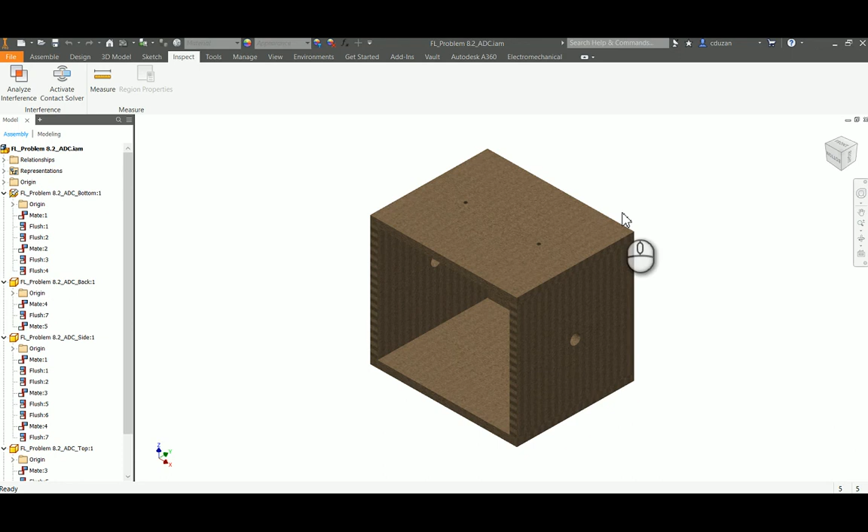So now we're at the point where we can begin assembling all these parts to create our Automata. I'm still looking at my assembly for my basic Automata, and what we're going to do is come out here and place in some of the parts that we're going to need. The first thing we're going to do is call on the axle IPT that we created earlier. I'm going to go ahead and bring that in.

And I guess at the same time, let's go ahead and place in the 2 follower rods we're going to need, so let's just drop those in. I think those were at 6 inches or something like that. They might be a little bit tall, but who cares, let's just make the thing work, right?

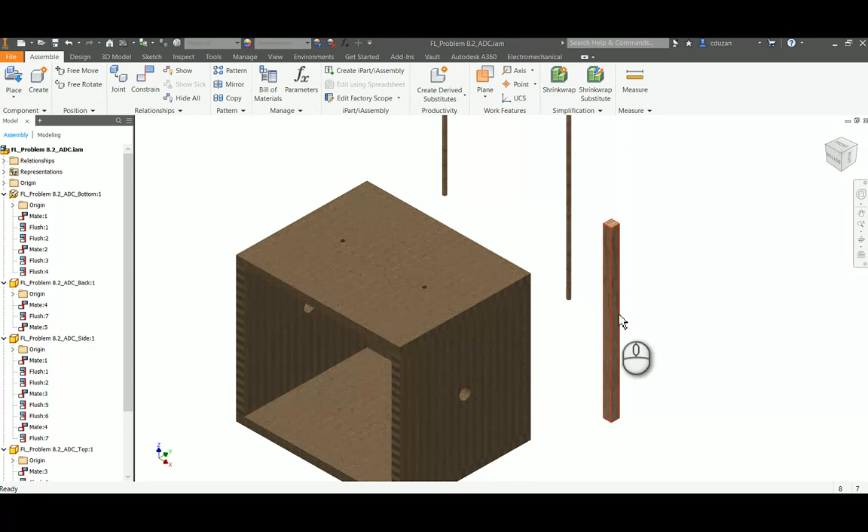So to get a square to go into a round hole, there's a couple things we're going to have to do. We actually need to talk to the square dowel, because we're going to give ourselves a little helpful tool, or helpful feature, that's going to allow us to get these to line up.

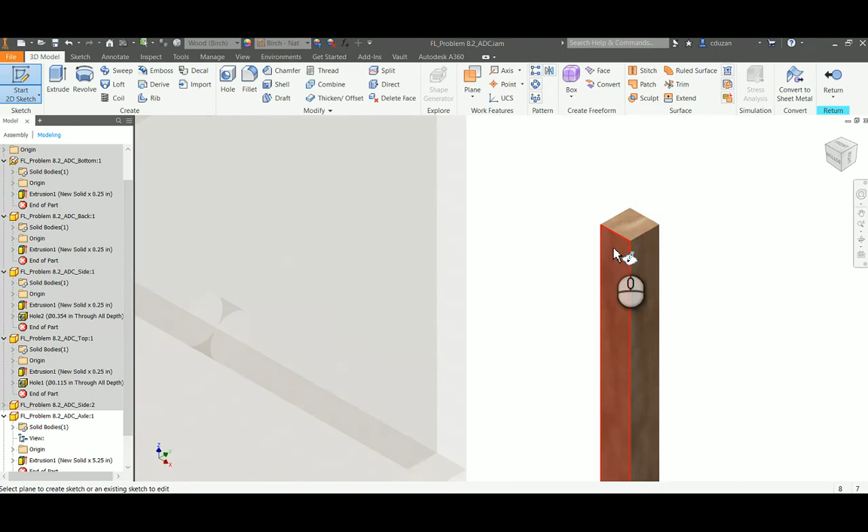So I'm going to double click on that square dowel from earlier, I'm talking to that IPT, and here's what we're going to do. We're going to start a 2D sketch on this face here. I have a point that is currently there.

And we can use that point to create something called a work axis. If the point is not there, what you can do is come up here and draw a point, and place it there. But I can see that my origin point is there, so we're basically good to go.

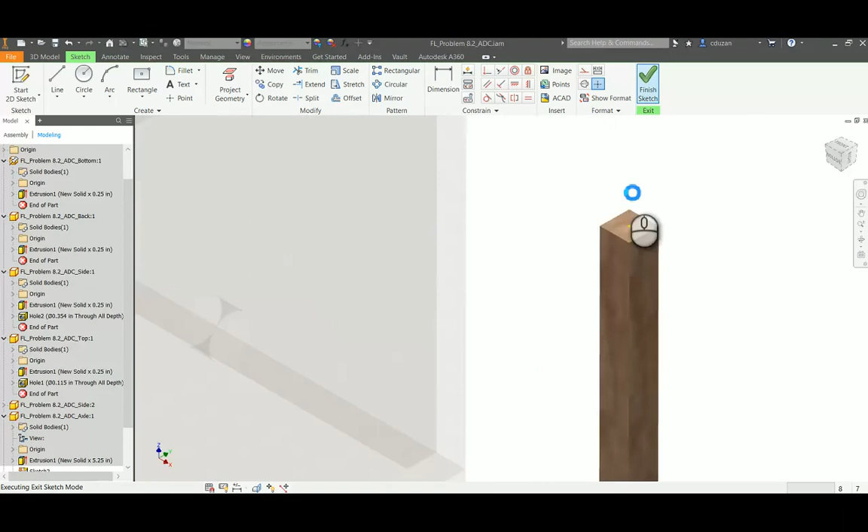So now what we're going to do is finish that sketch, and now I'm going to come up here and look for an axis. I'm going to pick on axis, and pick on this point. Then all I have to do to complete this is come over here and pick on this face. I know I have a white background, it's hard to see it, but there is an axis that is going right down through the center of that, and perpendicular with that face. That's a very helpful thing to have for this next part.

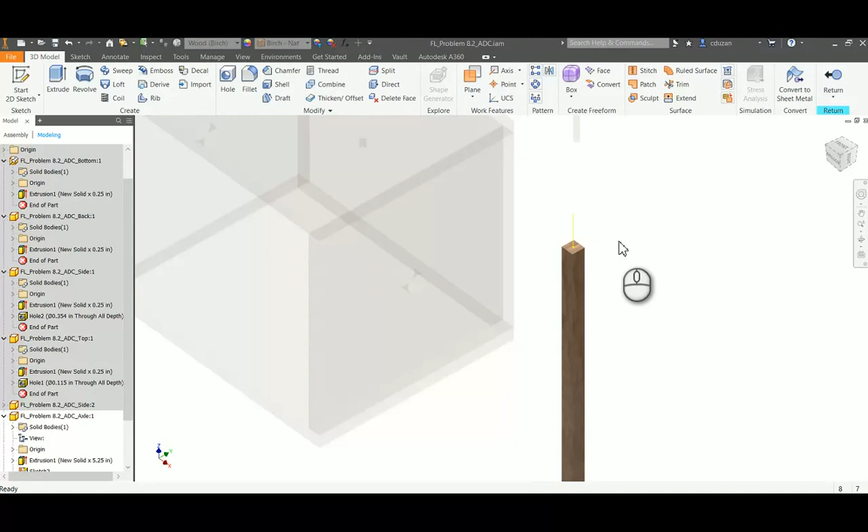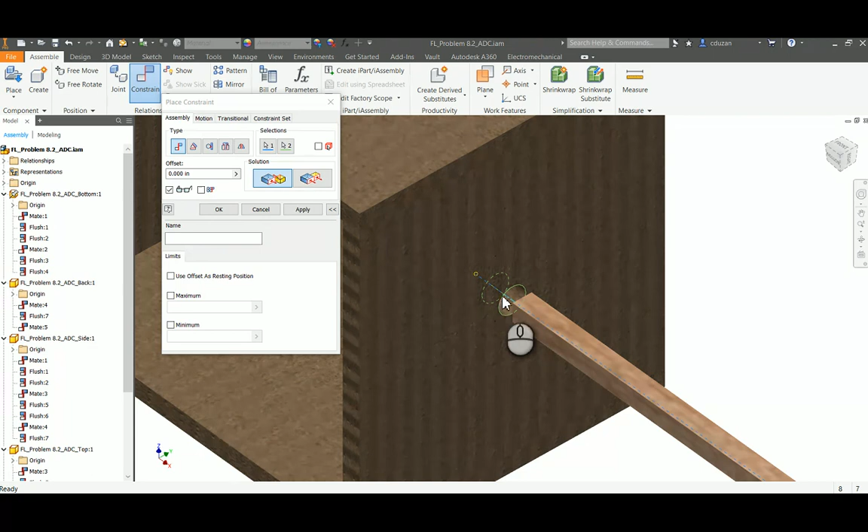So now what I'm going to do is return back to my assembly, and now I'm going to come in here and go to constrain, and I'm going to use my mate type of constraint, and pick on that work axis I just created previously. And if I come to the inside of this hole, you're going to see that this axis is showing up. So now it's actually going to match up the axis of the square dowel with the axis of this hole. I'm going to go ahead and apply this and cancel.

When I do that, now I can see that we can take this axle, and it's going to be able to rotate on that axis, and it's going to be able to slide back and forth through it. So that's great, we're in the right place here. What we're going to be doing next is come out here, and place the shaft collar that I created earlier.

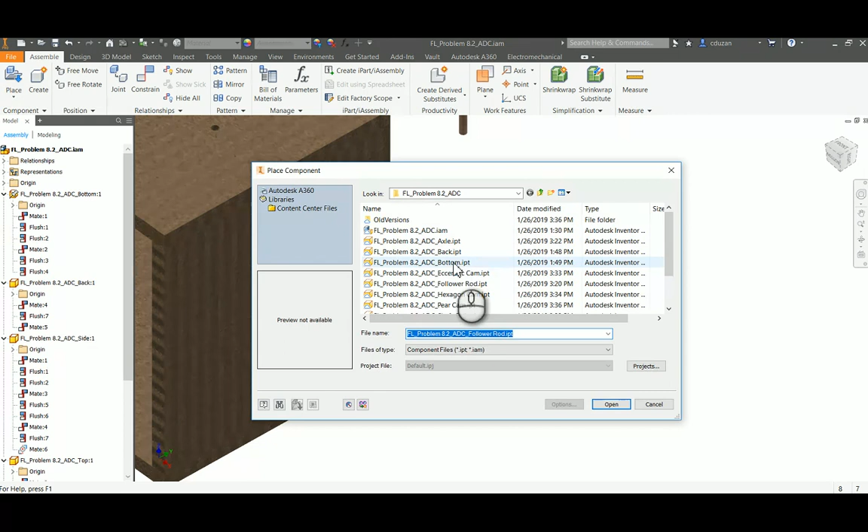I'm going to drop that right in here on both sides of our Automata box. Now I'll constrain it using mate to attach this face to one of the sides. Hit apply, and flush this, making those two faces coplanar.

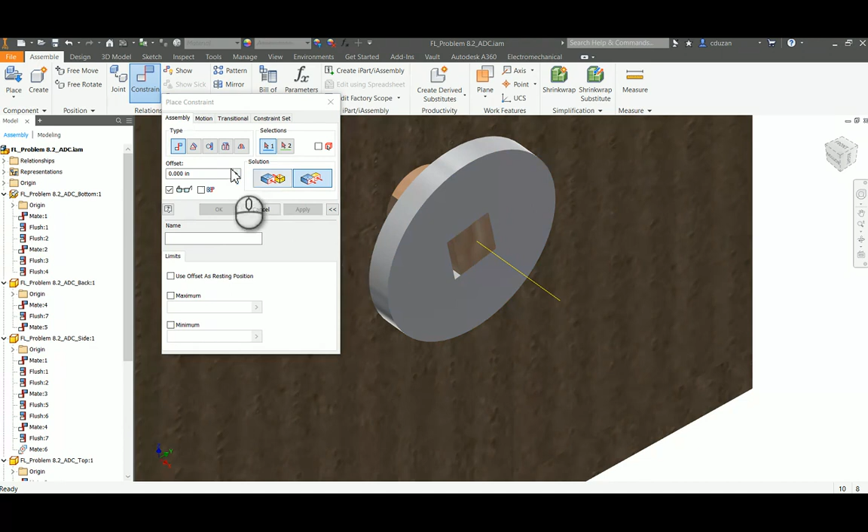Now, to finish this up, I can do a mate between this face and flip it around to this face as a mate. Hit apply and cancel out. Once done, we'll see there's now a relationship between that shaft collar and the actual axle.

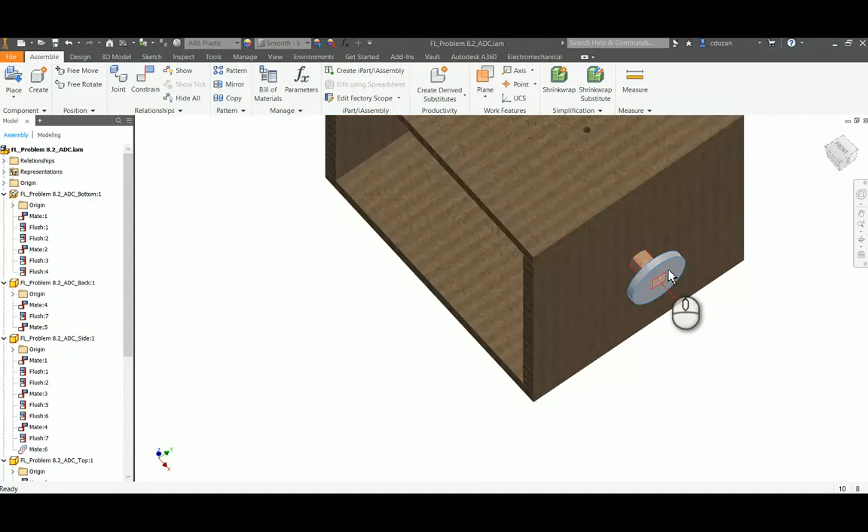Since I built in the distance to my axle earlier, all I have to do is come over here. I can pull this down if I need to—that's what everybody always kind of forgets. You can always pull this out so you can see this.

Now we can go into constrain and do a mate between this face and that face, and hit apply. If we've done this correctly, we should have enough of this axle hanging over the edge where we can now attach this shaft collar.

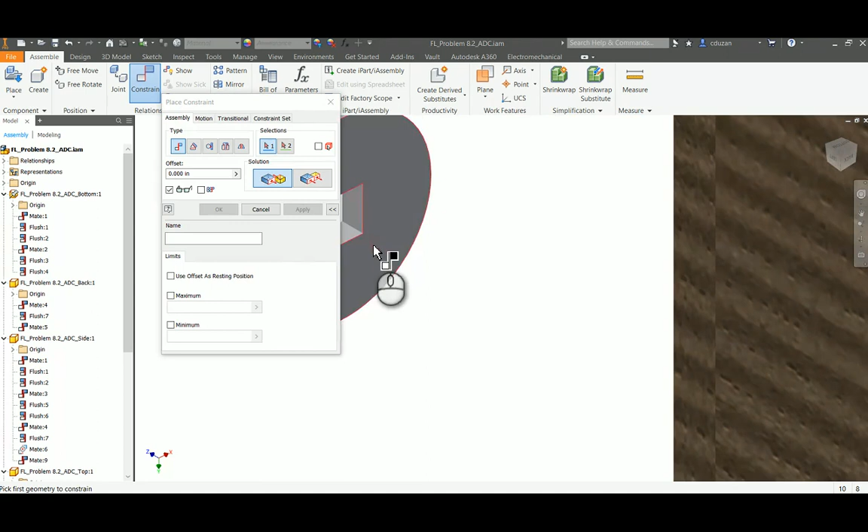So we go to constrain and say I want this face to mate up with this face, and hit apply. Even if it looks a little wonky, it's okay. We can go to flush, pick on this face, and say I want it coplanar with this face, then hit apply.

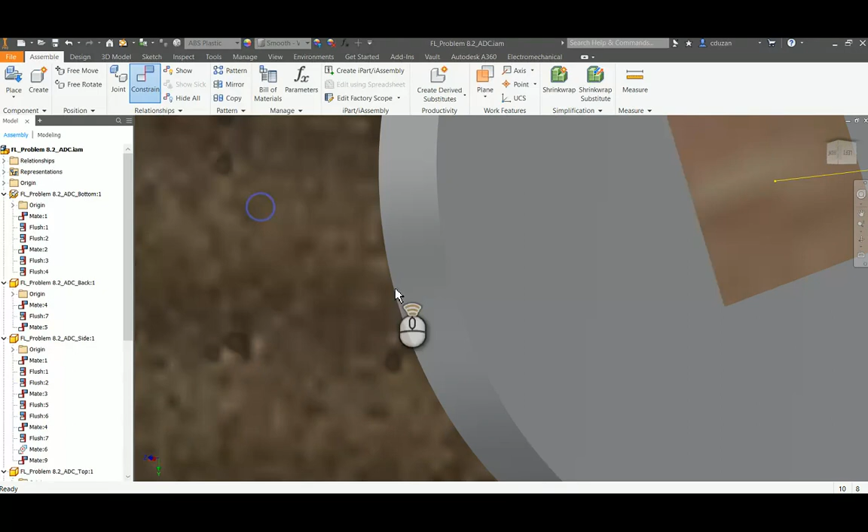Now we're going to see if this is able to move. If we need to pull this out to view it more, all we have to do is go to constrain and say I'd like this face to mate up with this face. When we do that, those shaft collars, made of ABS plastic, keep that axle exactly where it needs to be. It's able to spin but not able to roll along that axis, which is exactly what we're looking for.

The next part is I want our follow rods to go into the holes. The follow rods need to be able to move up and down, because eventually there will be a little pad on the bottom of these making contact with the surface of the cams. To do this, we go to constrain.

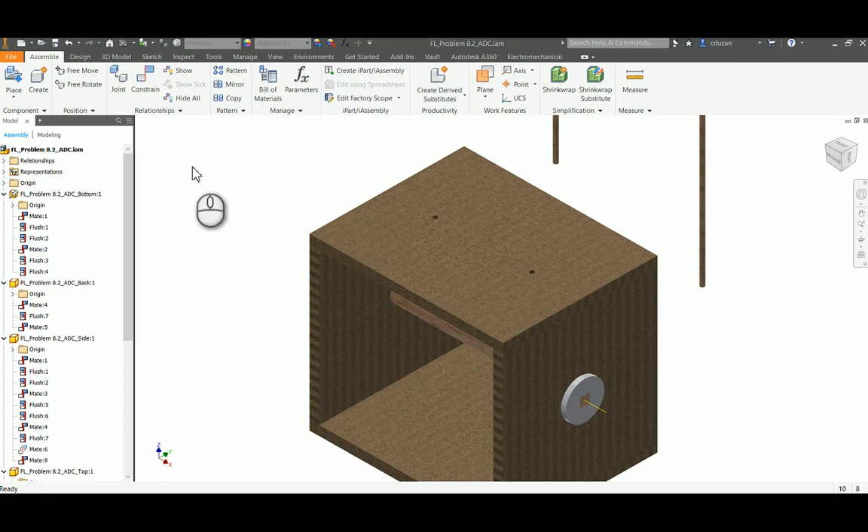We go to the mate type of constraint and the mate solution, zoom right in here, get close to this follow rod. I see there's an axis there, so I pick on it to verify, get close into the hole, to the inside of the hole, and say I want there to be a connection between those two axes. Hit apply and cancel out, and let's see what happens.

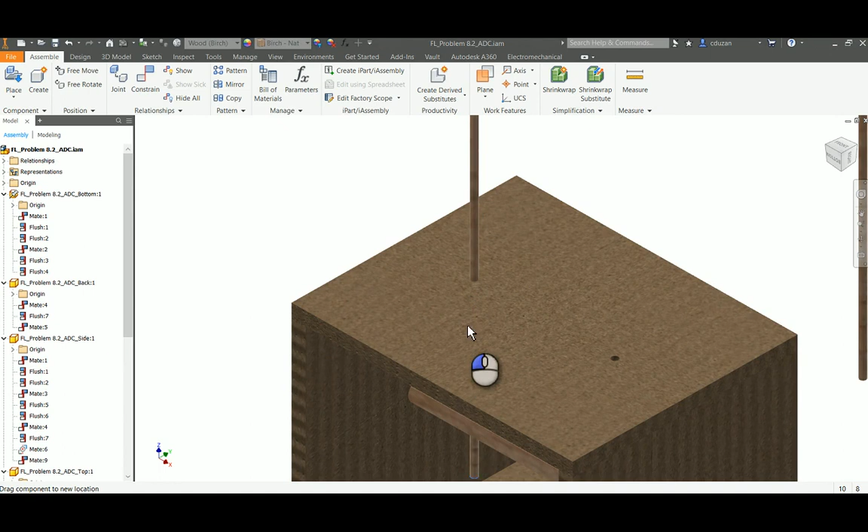We're going to see that follow rod is able to move up and down through that hole. If we've done this correctly, that should be directly dead center with this axle that is here. So we are moving right along.

We'll continue the same thing over here: go to constrain, go to mate type, mate solution, come in here, find our axis, and mate that up with the axis that's dead center of this hole. We hit apply and cancel out, and that will behave the exact same way the other one did.

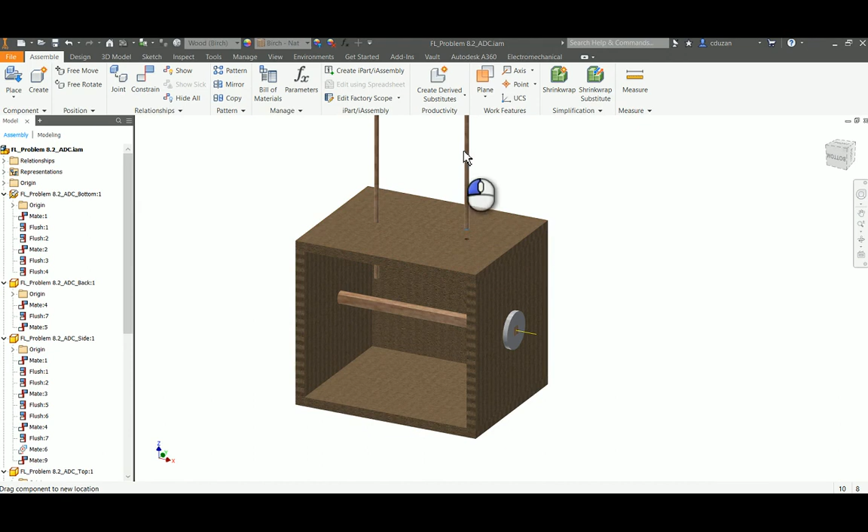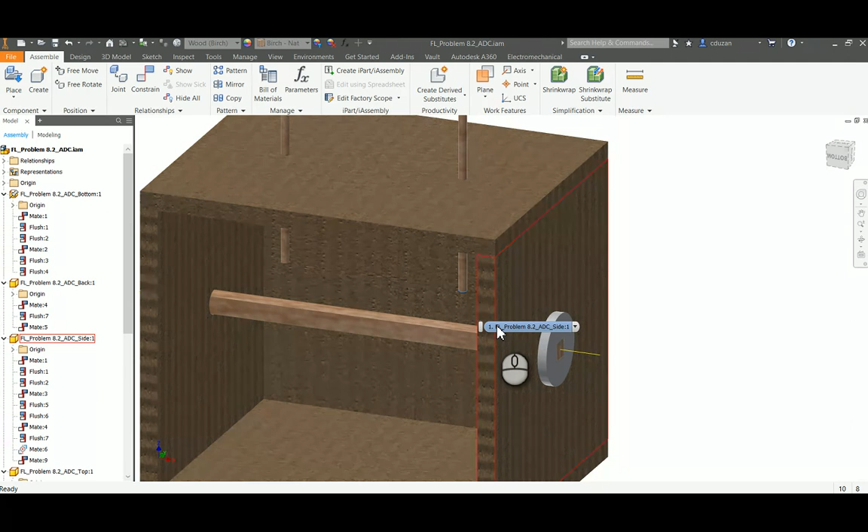Okay, so at this point in time, you are going to need cams. Up until now, we have not talked about how to create cams with parametric constraints and parametric equations. Under the session 2 tab of our website, you'll find some cams to use for this assembly. Depending on what story you're trying to tell on top of the automata, that will depend on the cam you're looking to use, since they give you different motions according to the motion graph established for that cam.

So in this case, I'm going to come out here and go to Place, and pull in the cams I'm wanting to use. If you do not have these, go down to the second session on our website. You can download those and use them.

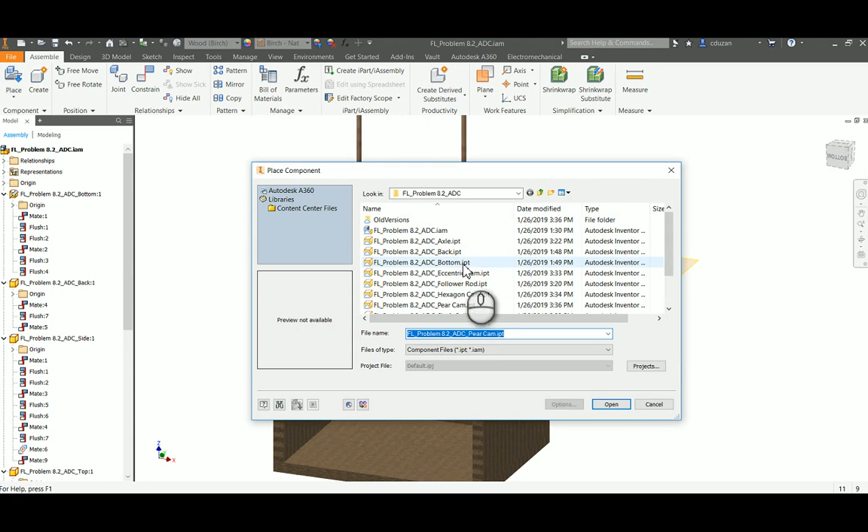I'm going to say in this case, hey, I'd like to use the pear. I'll go ahead and drop that in. And I'm going to come out here and place in... I don't know, snails. Nah, I'm going to go with the eccentric. Eccentric is always fun. So let's go ahead and drop in the eccentric.

So you're going to see there are a couple things happening here. We have a work plane that's bisecting, going directly through the center of that cam, and we can see there is a square arbor that matches the same dimensions as our square axle, our square dowel, which is 0.25 by 0.25.

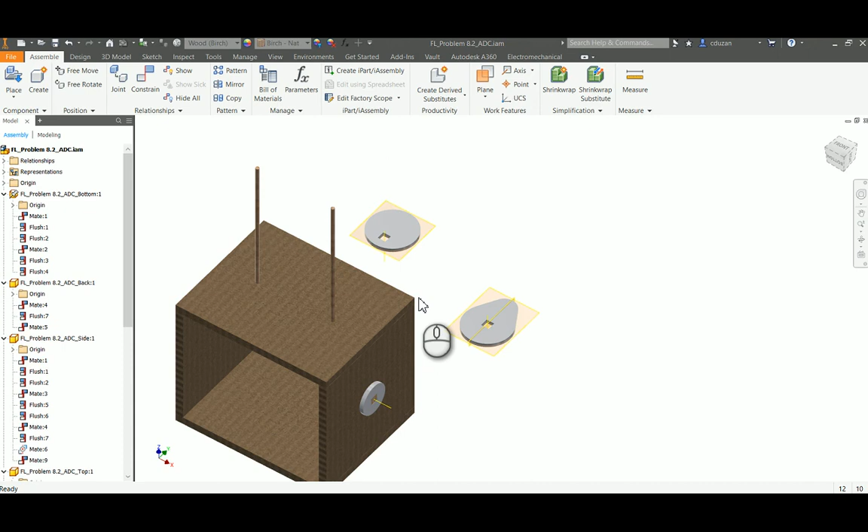With that being said and done, what I'm going to do is manipulate the rotation of this using free rotate. I'm going to just sort of nudge this into the right direction, keeping on the inside to use free orbit, getting to the outside to use constrained orbit, and I can get that placed kind of where I need it to be.

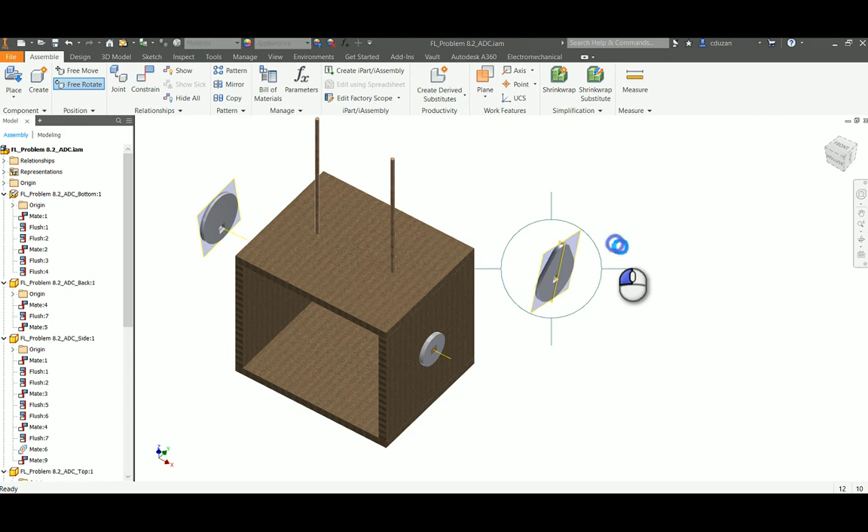Same thing for the pear cam. I can go out to free rotate, stay inside the globe to use free orbit, use the outside to get constrained orbit. So now I have this sort of nudged in the right direction and orientation I'd like to use in order to constrain these.

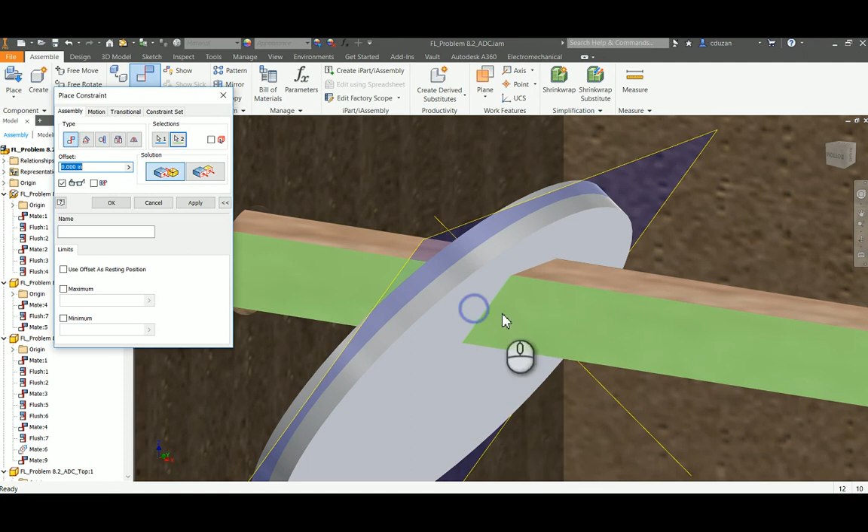With the next part, what we're going to have to do is constrain the cams to the axle. So in order to do that, we're going to go to Constrain. Now I'm going to come in here and say, hey, I want this to be a mate constraint between this face, and I can say, I don't know, we'll just say that face. I can go ahead and hit Apply and cancel out.

You're going to see that this is able to still shift and move, so I can go ahead and orbit this where I can see that bottom face of the cam, and I can say Constrain, I would like for this to be mated with the top of this face. I can now go ahead and hit Apply. So right now this thing is able to slide down the axle.

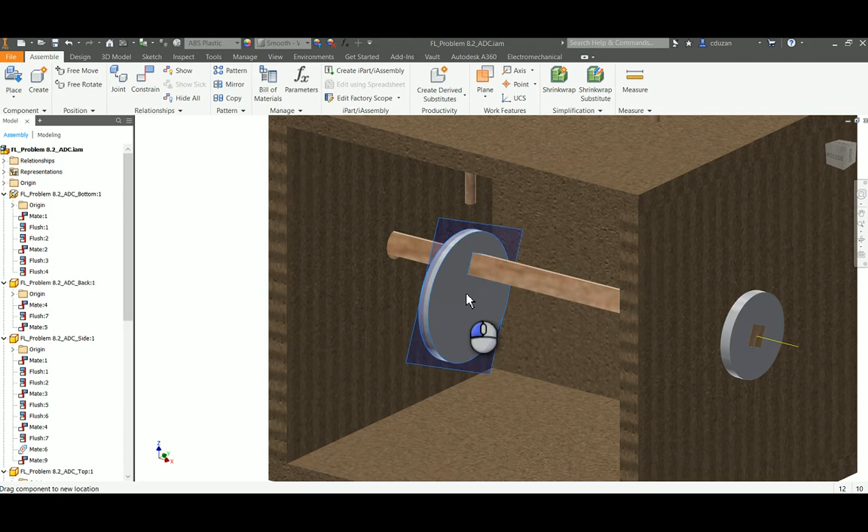When in reality, what we're going to be doing is, if we were looking at this from this face, we want this face here to be dead center with the actual follower rod here on top. So here's a really cool little solution to that.

If we come out here and double click on the follower rod, we can talk to this IPT. Now, when we go out to create our first sketch within an IPT, it's going to give us those 3 work planes. After you pick a work plane, they disappear, and everybody thinks they are gone forever. The case is they actually do not — they just simply turn off. So check this out.

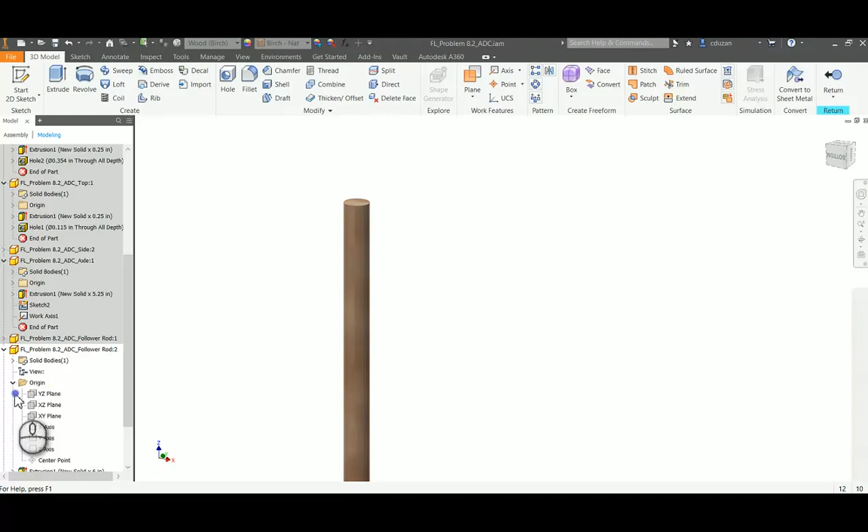If I come here to the follower rod IPT within the model, if I come down here to the origin, I can now come out here and find those planes that I originally had seen when I first created this. What I'm going to be looking for is either this plane or this plane to use.

All right, so what I want is for that to actually stay there. I'm going to right click on that, come out here to visibility and check it, and now you can see that work plane stays on.

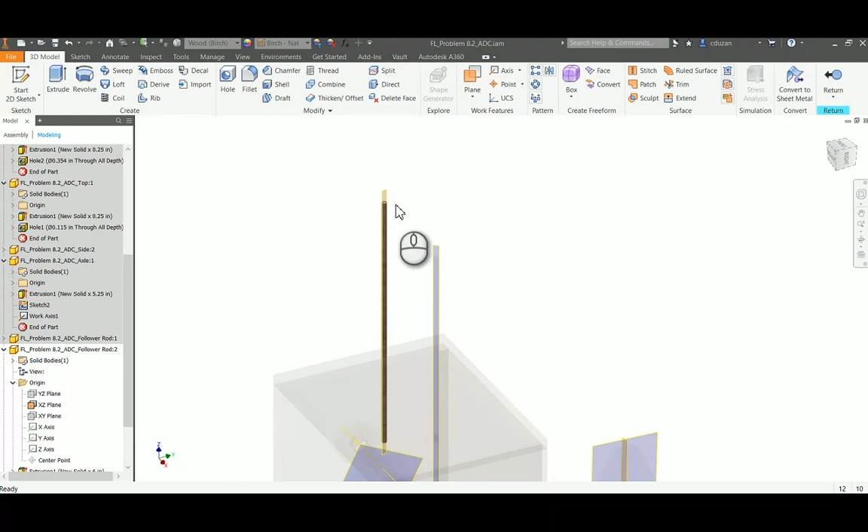At this point in time, I'm still just simply looking at the IPT, I'm still talking to the IPT, so what I need to do in order to interact with the assembly is go out here and hit the return button to come back to the assembly.

So now what we have is two work planes, right there, very close together. What I'm going to do is go out here and do a constraint to keep these work planes together, and that's going to form a relationship where they're dead center on top of one another, in order to be able to work together here in just a couple minutes.

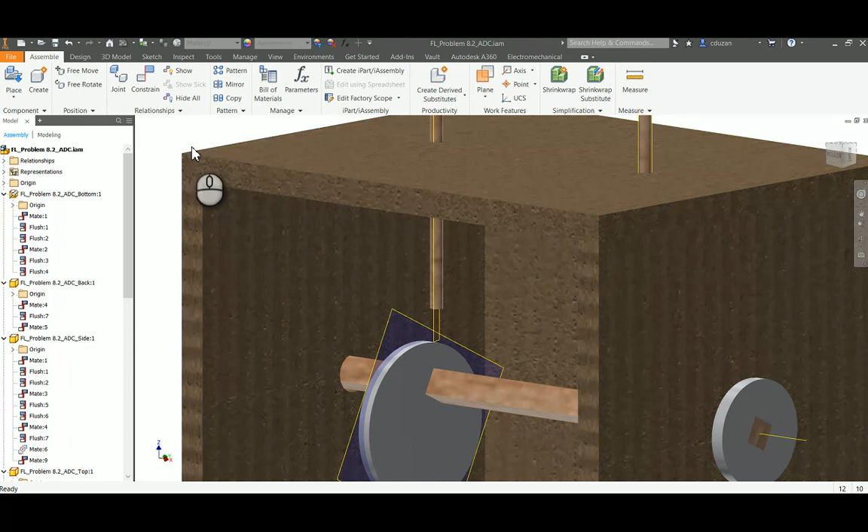So in order to do this, I'm going to come out here, and I can either use mate or flush, it does not matter. I'm going to say I want this face, or this work plane, to mate with this work plane. I'm going to go ahead and hit apply and cancel out.

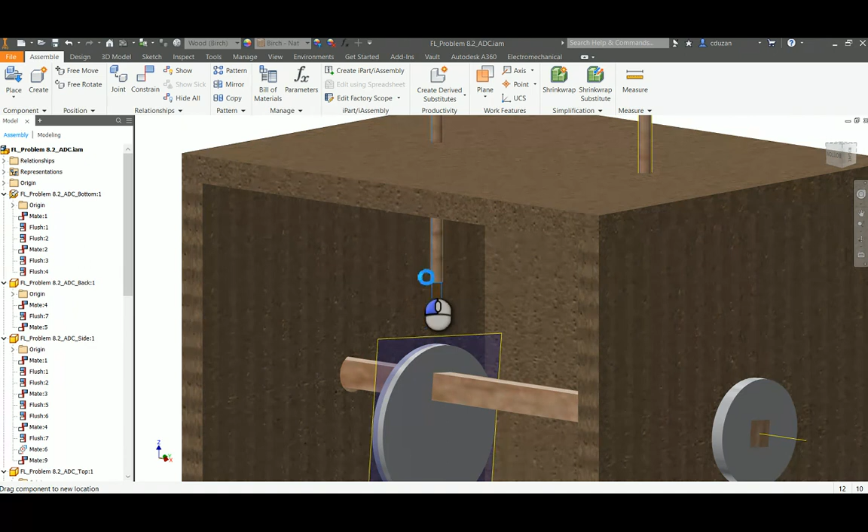And now when I come back here to the cam, I'm not able to move this down the axle like I was a minute ago. Now when I'm also doing that, I'm locking this follower rod where it is going to be dead center with the top of that cam. And I want that to happen.

So we're going to do the same exact thing we did before with our pear cam. This time I'm going to go out here and do a constraint, and I'm going to mate that face there with one of these square faces here. I'm going to go ahead and do an apply.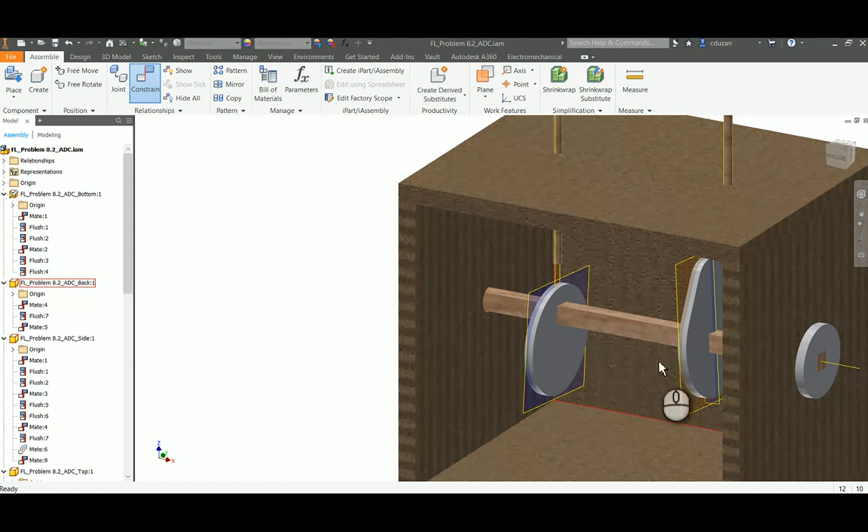Okay, I can come into this pair, I can drag this off where it needs to be. So I can come and find a face in which I can mate that to the top of the axle. I can go ahead now and hit apply.

So we can see that this work plane is going dead center down the center of the cam. And since I applied that work plane earlier to this follow rod, since this is a duplicate, we now see that we have this work plane to work with.

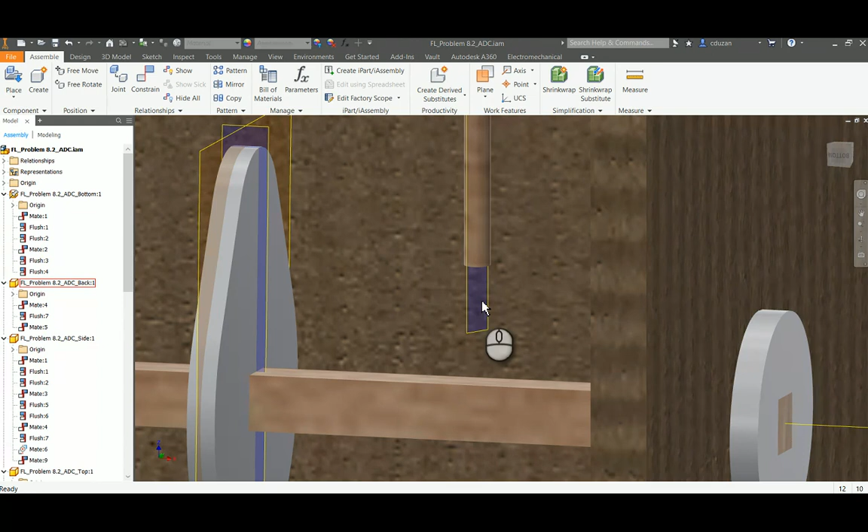Now all we have to do is go out here and do a constraint. It's going to be a mate type of constraint, does not matter on the solution. So I'm going to pick on this work plane and go ahead and pick it to this work plane. I'm going to hit apply and cancel out.

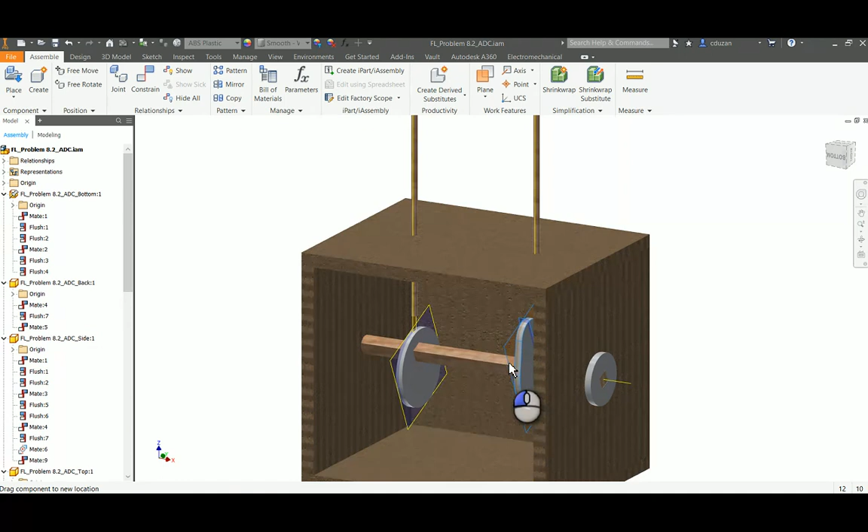And when I look at it from this face, I can see that that cam and that follow rod are directly dead center. The cam is not able to move down the axle, and I can see that the follow rod is still able to move up and down.

So in reality, we have made these cams out of corrugated plastic, and we've got this very small, less than 1/8 of an inch diameter follow rod that's going to be making contact with the top of it.

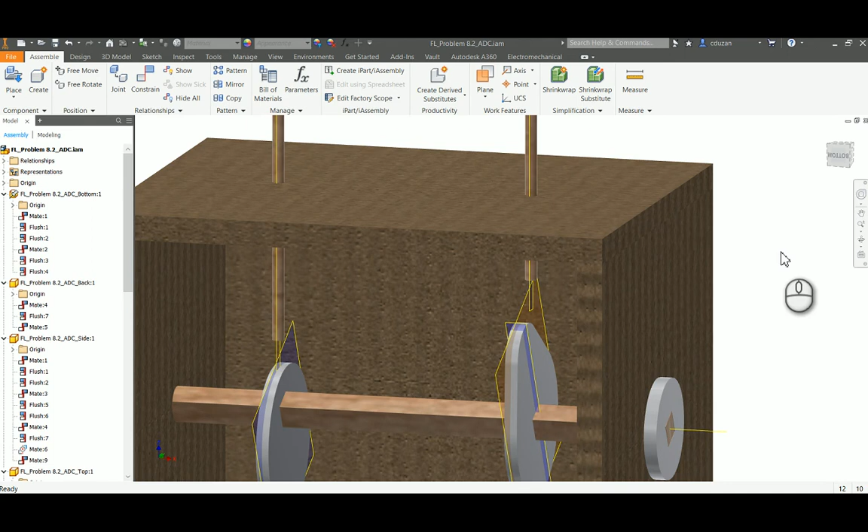What I'd recommend that you do is go out there with corrugated plastic and make some sort of a base or a foot that's going to be larger than the diameter of that follow rod, since it's going to be making contact with the top of the cam. So we're going to go out there and just create that quickly.

So I'm going to come out here, create a new IPT, start a 2D sketch, and we're just going to make a very simple disc. Let's just make it a 1/2 inch diameter maybe. Finish that sketch, and go ahead and extrude this to the thickness of our corrugated plastic, which is 0.125.

And I'm going to come up here and just create this out of ABS plastic because obviously corrugated plastic is not going to be available. I can now go ahead and save that.

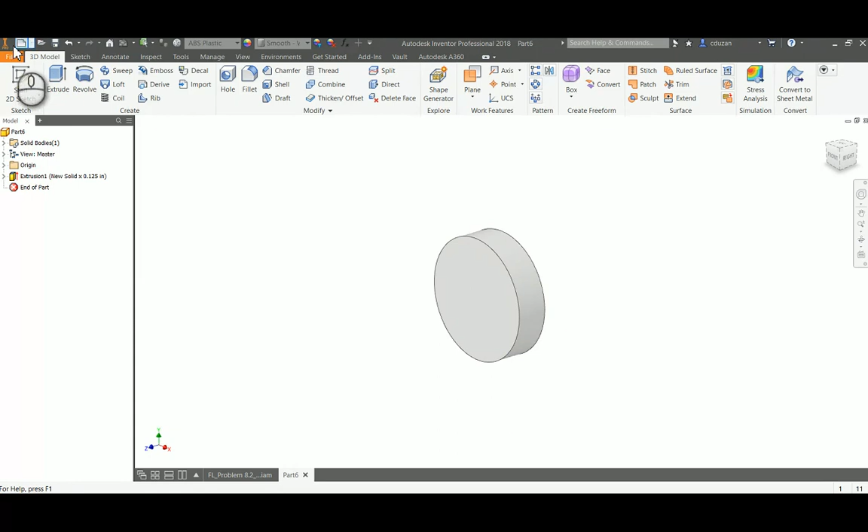Okay, I'll just piggyback off one of these and we'll call this one follower rod base. Now we have that part to use, so I'm done creating that. I can go ahead and close it, and now I can come out here and place in that follower rod base. I'm going to need 2 of those.

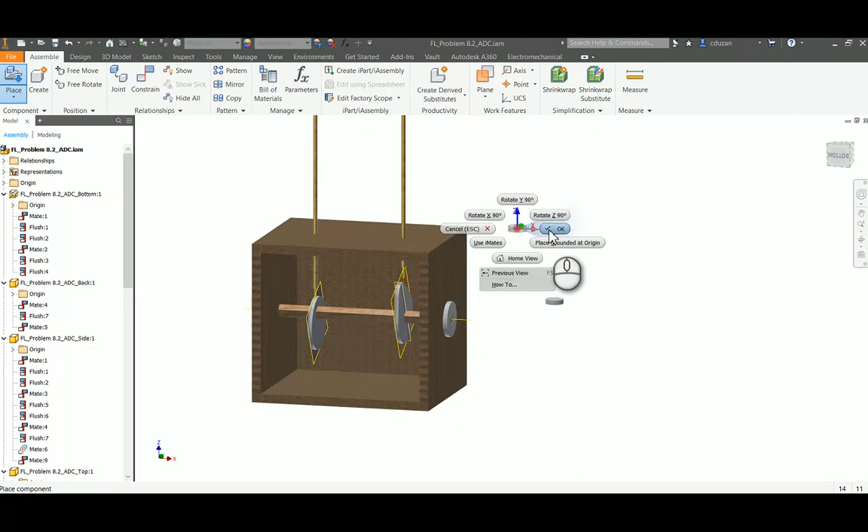Right now just picture this as the corrugated plastic you're actually going to use with the physical construction of your automata. So what we have to do is go ahead and get this to line up with this and be attached to it.

So we can go out here to constrain. The first thing I'm going to do is say, hey, I would like for this face to be making contact with the bottom of that follower rod. So I'm going to go ahead and pick on that face. Go ahead and hit apply.

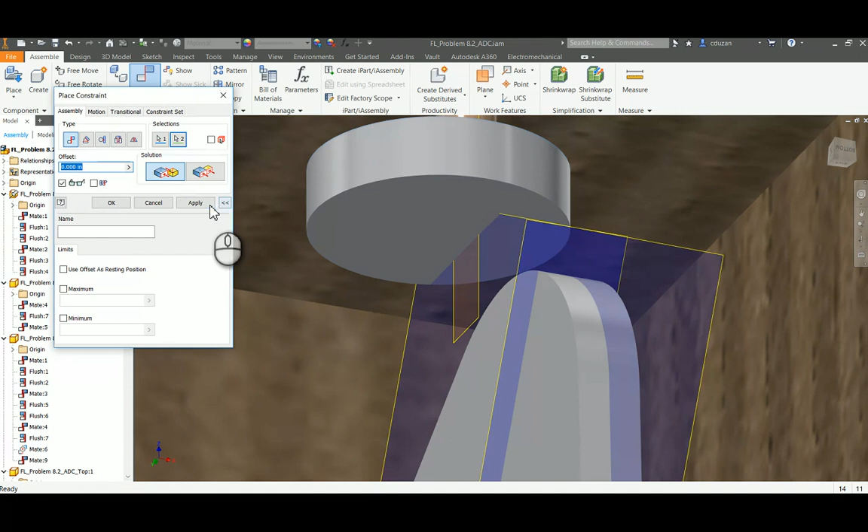Now the problem is that this thing is going to be making contact with it, but it's going to be able to slide wherever. So in order to finish this up, I'm going to go out to constrain, get to the side of this follow rod base, find the axis, and now come here to the follow rod itself, find the axis.

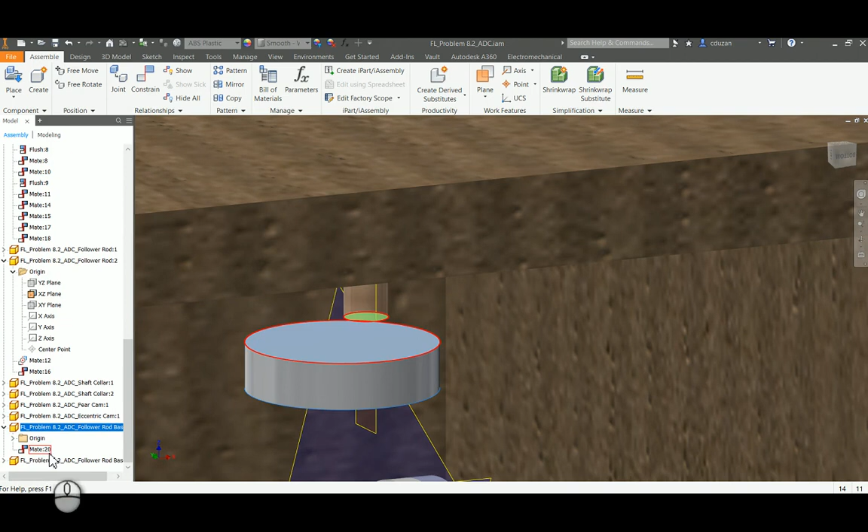Okay, and it's going to be making that relationship between those two. Something tells me I think I might have moved off of it. Let me just take a look at what happened here. I don't think anything happened. Let's try it again. Constrain, mate that axis to that axis. There we go. Hit apply and cancel out.

And now we're going to see that that thing is able to follow the follower rod. It's the very bottom of it.

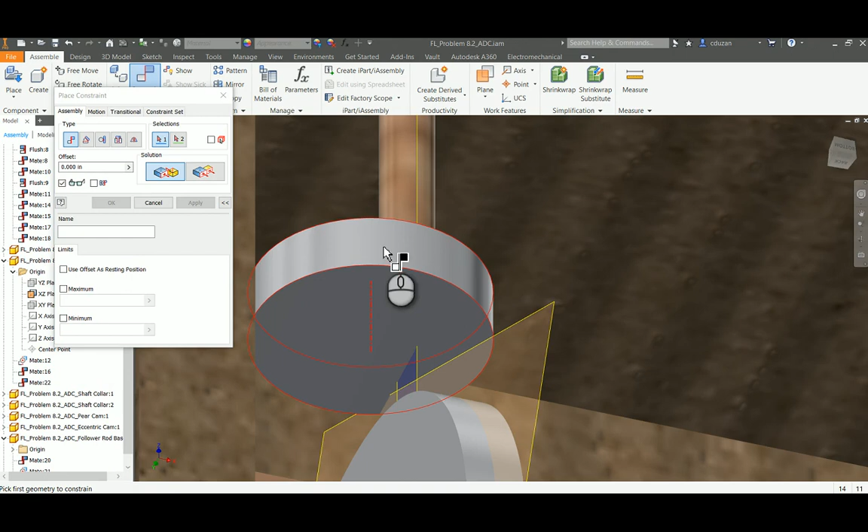Okay, so we're going to repeat the same process. Go to constrain. We're going to mate that face with the bottom of the follower rod. Hit apply, and now we're going to come to the side of this follower rod base, find the axis, and have that mated up with the axis of the follower rod, and hit apply. Now when we move this up and down, we're going to be seeing that that is following it.

Last part of this is now we need to create what we call a transitional constraint between the cam and the actual follower rod base. Remember, everything so far is we're just simply going out and using materials that come with the box kit, according to the sizes of those materials.

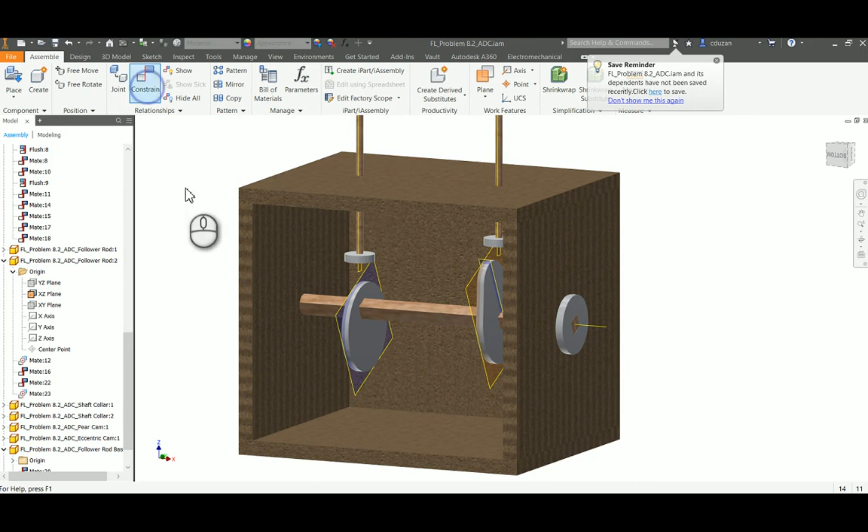So let's come up here, go to constrain. This time we're not going to be looking at an assembly constraint. Instead, what we're going to do is come over here and go to a transitional constraint. Here's what I have learned: when you go to use transitional constraints, it is best to come here to the bottom of the follower rod base first, and we'll select that face. Now we will flip this over.

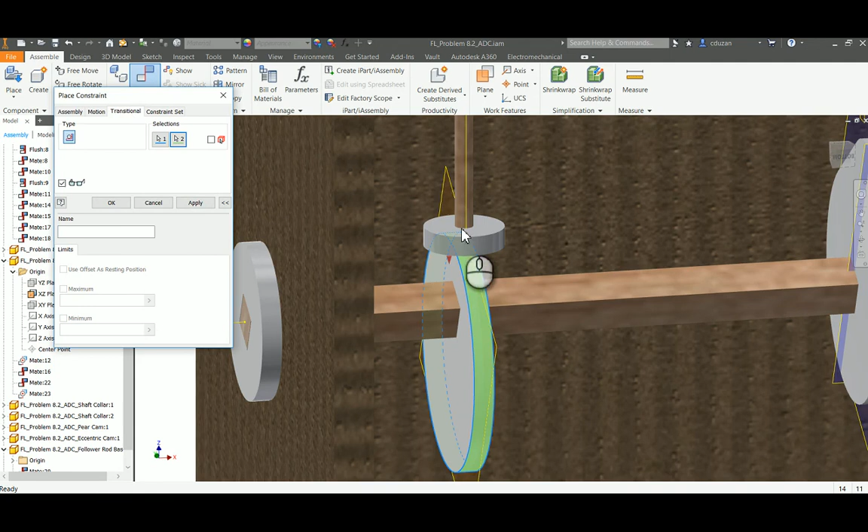Come over here to the surface of the cam, and we're going to select that. Now we're going to see that there is a connection between those two. And if we come over here to our shaft collar and we rotate this, we should be seeing that connection between the follower rod and the actual cam.

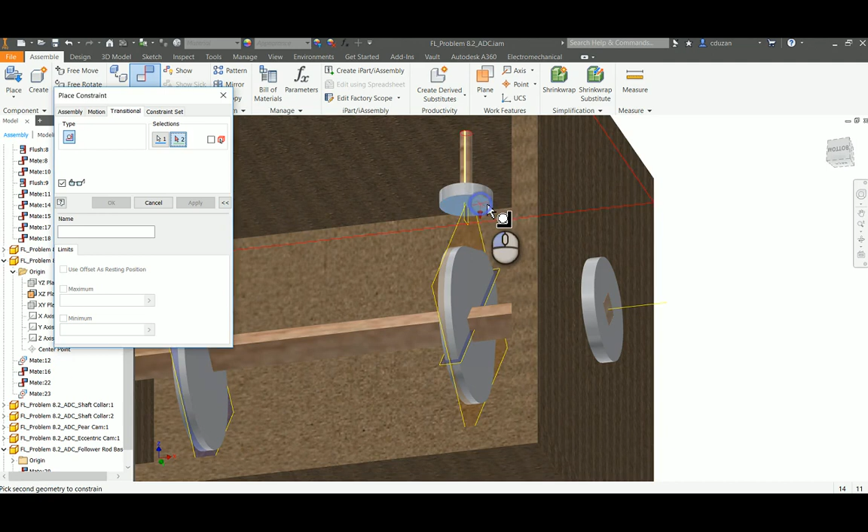All right, let's keep going here. We're going to come to the bottom, go to constrain, transitional constraint again, come to the bottom of this follower rod base and go to the actual surface of the pear cam. Go ahead and hit apply, and that should go out there and give you that transitional constraint.

I can see it is getting a little bit fussy. Unfortunately, Inventor can't crunch the numbers sometimes when it comes to transitional constraint. So sometimes what you have to do is go out there and modify the base of your follower rod, and give it sort of a rounded surface. Usually when that happens, we can get this transitional constraint to work.

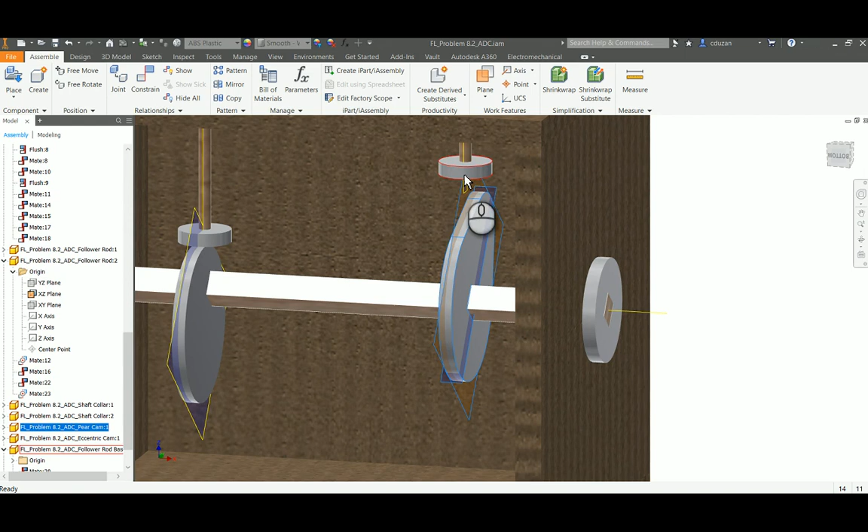So I'm going to pause just for a quick moment, and I'm going to go out there and actually add something to the bottom of these follower rod bases.

Okay, sorry about that pause. I got a little bit ahead of myself.

In reality, what we're going to be doing is creating these flat discs that are going to be at the bottom of the follow rods, and we're calling those the follower rod base.

When it comes to Inventor, it's a little bit fussy when it comes to that transitional constraint, and you just saw that a second ago. So here was my solution to it. I have to tell you this when it comes to the Inventor portion. I'm going to come out here and open that follower rod base, and explain to you what I did.

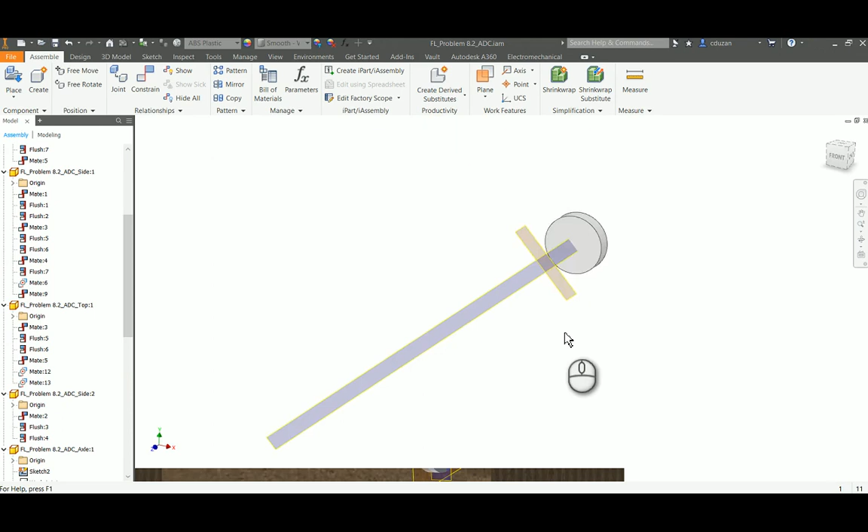This looks all sorts of ugly because we have work planes on. At the actual bottom of it, I came out here and created this sketch. All I did was put an arc, a nice, large radius arc, and drew a line to connect that arc together.

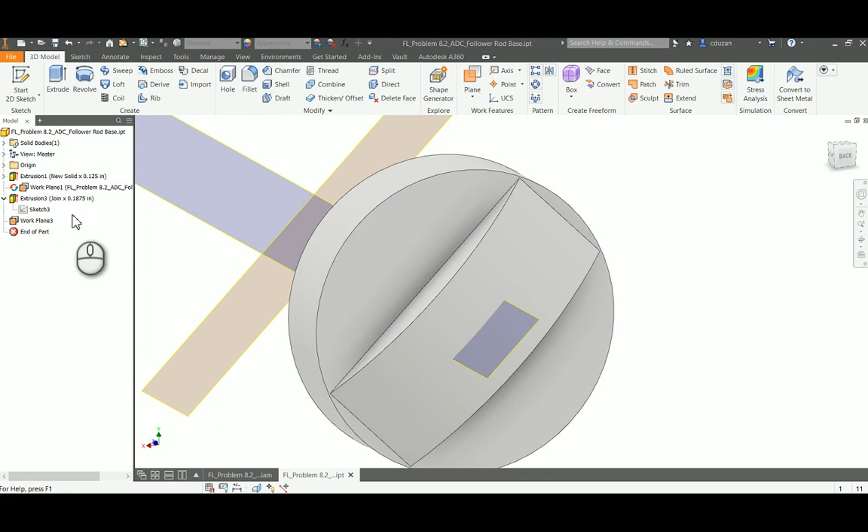Then when I went to do my extrude, I did a symmetrical extrusion. If you take a look here, you can see how it goes to both sides, the distance I went out there, and I created this extrusion.

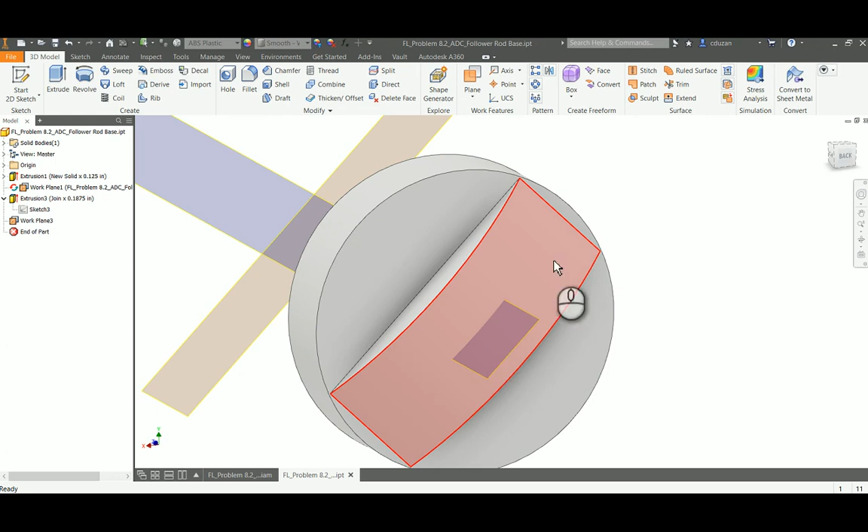Now we have this rounded feature at the bottom of the disc. In reality, the flat disc is going to work just great, but when it comes to transitional constraint in Inventor, I have learned that you do need to put that little arc at the bottom that's extruded out.

So I'm going to go ahead and just close out of this. No, I don't want to save those changes. I want to keep it right where it's at.

Now I'm going to show you how, once again, we can do that transitional constraint. It can get a little fussy, and this can be a frustrating experience, but if you do put that little arc there on the bottom, it should work. Just warning you with the word should.

So I'm going to come out here and find that transitional constraint. I'm going to delete it real quick just to show you that this will work. I'm going to come out here to the pear, find that transitional constraint, delete it.

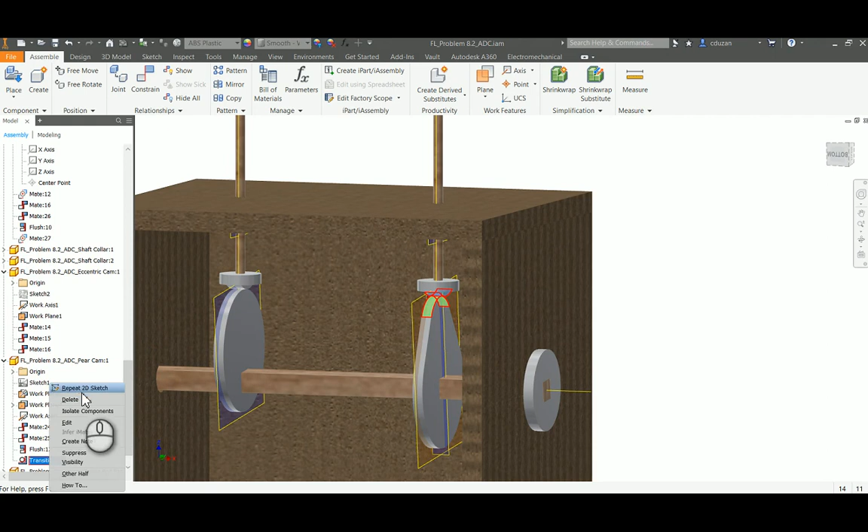Okay, I'm going to go ahead and pull these up. Let's do this again, one more time. I'm going to go to constraint, go to transitional constraint. I'm going to come in here and grab that curved edge, that face of that curved edge, and create this face, and go ahead and hit apply, cancel out.

Now I'm going to come over here, go to constraint, go to transitional constraint, pick that curved face, and now go ahead and pick the face of the pear. Go ahead and hit apply. I'm going to cancel out of that.

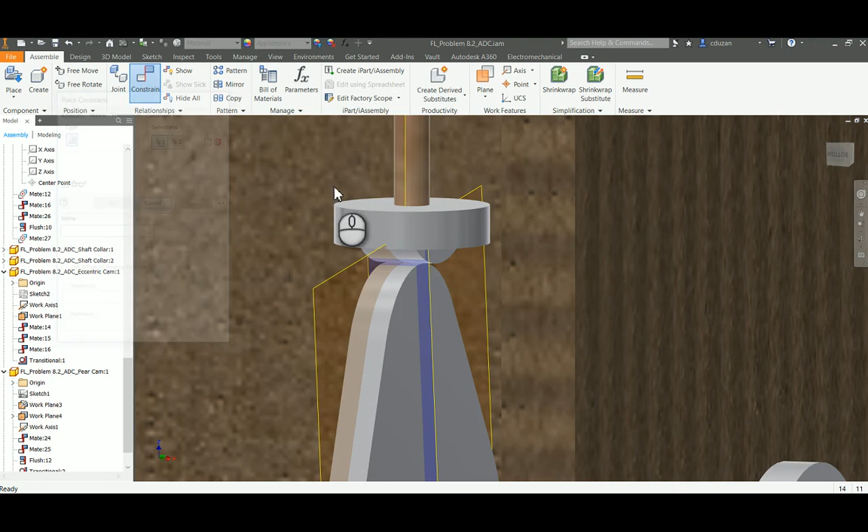Now if we come over here to our shaft collar and move this, we should be seeing that relationship between the follower rod base and the actual cam. So there you go, just a little hiccup at the end. Just know when you come to virtual construction of this, on the follower rod base, you do have to give that curved surface for the transitional constraint to work.

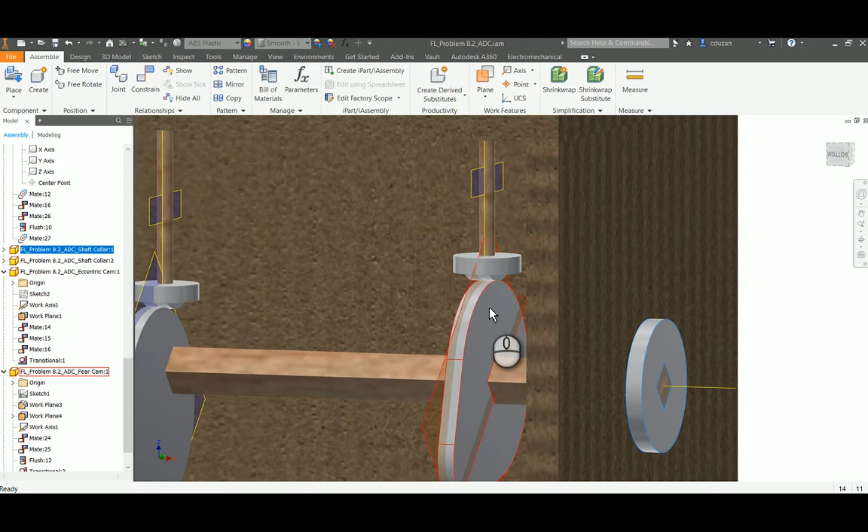So this is the point now when you can go out there and begin focusing on what you're going to be putting on top of those sticks, the top of the follower rods, to animate your little scene.

So this is when the sort of customization comes into it. Kids can get very, very creative, creating their own little parts, maybe some sort of linkage between them. But this is very basic assembly and construction of the Automata using the PLTW box kit.